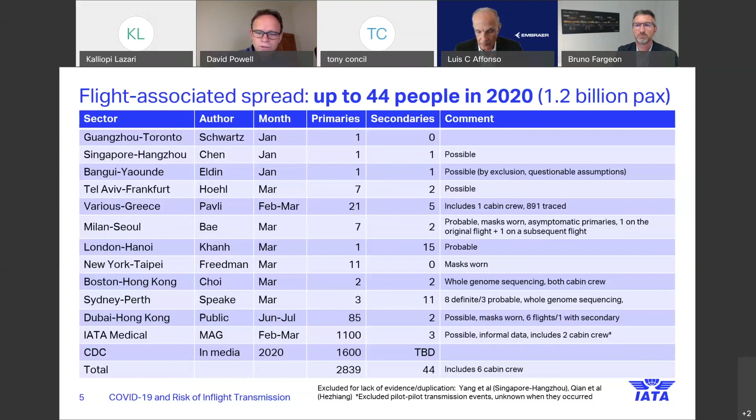So there we are, that's the summary. If we go to the next slide, totaling up those, it's around 44 - maybe a few more or less - but that's a tiny number, because even this year, at this point, 1.2 billion people have travelled.

So we're talking about one secondary case from the flight for 27 million travellers. Now, of course, this may be a gross underestimate of the actual number, but you can see that even if the real number is 10 times that, we're still talking about very, very low numbers.

One of the comms teams sent me figures from CDC for lightning strike. There are two different figures published in the US: 1 in 500,000 people per year, averaged over a number of years, and the other figure was 1 in 1.2 million people per year for lightning strikes. They're very different events, but it gives us an idea that this is an uncommon event.

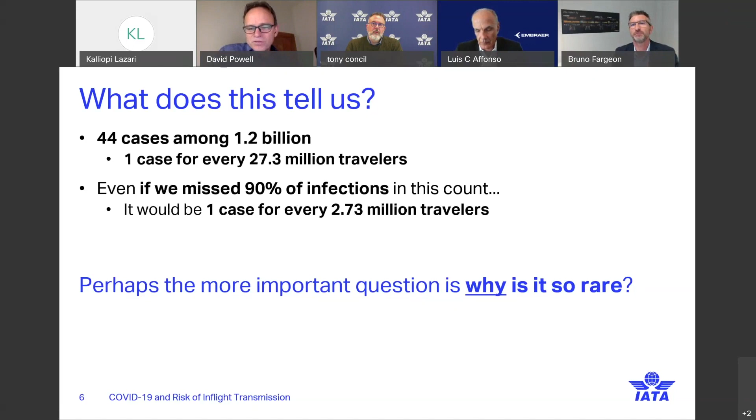So does that make sense for it to be so rare? Is that plausible, and why might it be so? Well, that's why we've brought the aircraft manufacturers to the table to discuss this, and just to give a prelude to some of what they'll discuss: we know that a number of features of the airline cabin have effectively designed in protections against transmission of airborne organisms, and here are a few of them.

Simply that people sit still, they face the same direction rather than face to face with each other. They don't tend to sing or speak loudly, and of course they don't tend to fly when unwell, so coughing and sneezing is not as common as in some other situations. The seat backs themselves act as a physical barrier.

And you're going to hear more about the airflow, but it is designed to minimize fore and aft flow of air, and the flow rates are high, and any recirculated air goes through high quality HEPA filters, and that's where the comparison often comes into hospital air supplies.

So I'm stealing the thunder of our esteemed guests from Airbus, Boeing, and Embraer, and we'll stop doing so and hand over to them. Thank you very much.

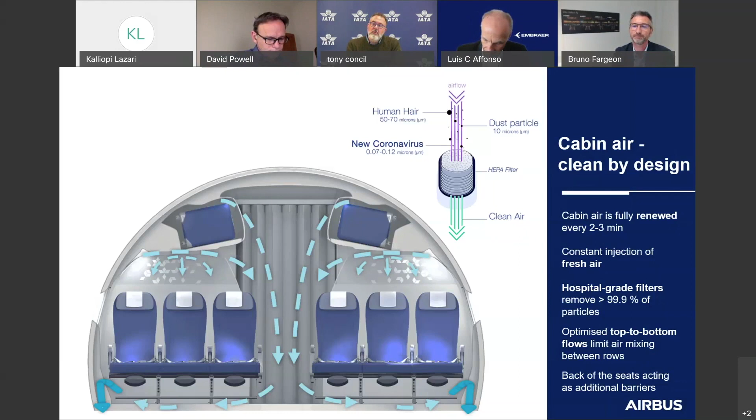However, we also recognize, in June I would say, that we're still seeing fears in some passengers, and we wanted to do some extra work and extra checks on how droplets, as emitted by a cougher or a talker in the aircraft, would circulate and therefore could potentially contaminate somebody by transporting the virus.

To do that study, we started by using our very detailed 3D computational fluid dynamic model that we have used to design the cabin flow for years. This very strong model has also been tested and validated against real data coming from flight tests or ground tests. So really, we know that the theory and mathematics behind the model truly match the reality on the ground and in flight.

We also asked medical specialists to tell us what they think is important whenever we want to inject a human event — once again, breathing, talking, coughing — into this model, and they were of great help for us to understand what we had to modelize. The model in fact meshes more than 50 million data points inside the cabin, and for each of these points we compute airspeed, direction, temperature, and the number of droplets passing by. We repeat this calculation up to 1,000 times to represent 1 second in real time.

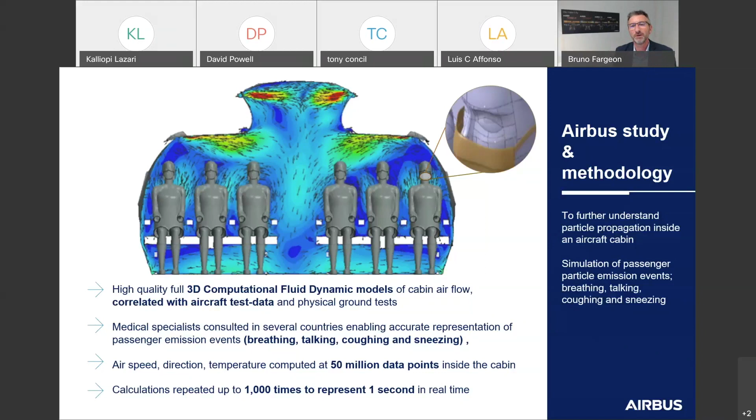And really wanted to explore all the space that can be explored with that kind of simulation. At the end of the day, that's what we found.

Keep in mind, one cougher, seen somewhere, is going to expel, in our model, 10,000 droplets from various sizes, a distribution of sizes from very small droplets, 1 micron, to large droplets, 750 microns. So the cougher is going to expel 10,000 droplets. He or she is wearing a mask.

The mask is going to stop some of the droplets, the biggest ones generally. Then gravity is also going to catch the remaining droplets which go through the mask, and they will fall on the ground in front of you. The smaller droplets will continue to float into the air, but the airflow of the aircraft, as I explained, is going to wash that very rapidly as well.

Some droplets will still go through, and they will be stopped by the mask of the person who is receiving, who is breathing. And then at the end, out of these 10,000 droplets, only 5 at maximum will reach and be inhaled by the person who is breathing. And this person can be seated next to the one who is coughing. As I remind everybody, we have fully loaded aircraft with all seats occupied by passengers.

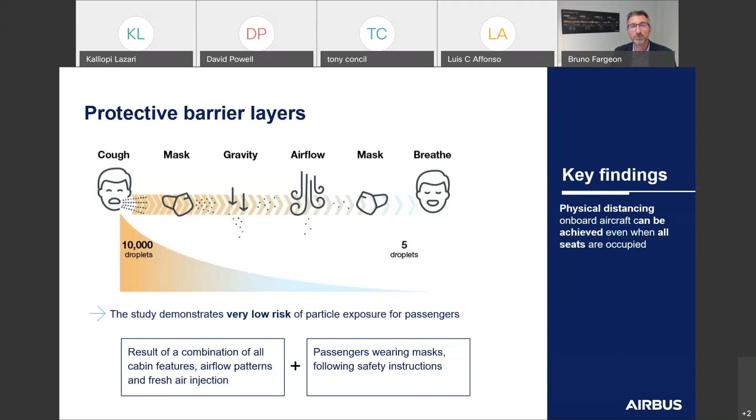And the medical yardstick that we use today is the social distance, the so-called physical distance, depending on the state. Some countries are speaking about 1 meter, others are talking about 1.5 meter. We took the most conservative one, which is 1.8 meter or 6 feet, coming from the US CDC.

And we did exactly the same thing as with the aircraft. We simulated with our model one person seated in an indoor environment, coughing, and we seated persons 6 feet apart from this coughing person. We also looked at the number of droplets that the others, being 6 feet apart, would inhale. And when we did that with the same model, what we found is that people could inhale 10 particulates, 10 droplets at maximum.

So think about it. When you're on the ground and standing 6 feet from each other, you could eventually inhale 10 droplets. When you are sitting in an aircraft next to each other, wearing masks, with the airflow washing constantly, at maximum you could inhale 5 droplets. So that means clearly that the aircraft is even safer than the recommendation that we have from authorities today to be standing or sitting 6 feet apart on the ground.

So as a conclusion, even with this medical yardstick, we really can say that the risk of being infected through the propagation of droplets in aircraft is very low.

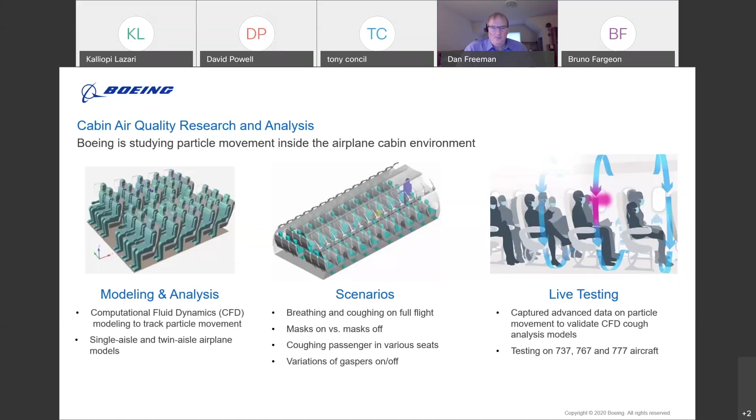So we're trying to relate the airplane risk of transmission compared to other common scenarios. And so we've picked two other scenarios to do the comparison.

The first one is what we consider the worst case for an aerosol transmission. It's where we have a cougher and a breather that are both in an indoor environment with stagnant air. There's no airflow, and that means there's no airflow to disperse the particles. The particles come from the cougher, who's pointed at the breather. They expand in a conical shape. And we measure the number of particles in the breathing area of the breathing person at different distances.

As Bruno mentioned, the heavier particles will drop out of the path because they're heavy and due to gravity. And the cough, because it's a conical dispersion, not all of the particles from the cougher will get to the breather. We've done simulations and understand how many particles will come into the breathing area.

The next scenario is a conference room where we'll have standard building airflow, air coming in and air exiting the building. We have a cougher in the room, maybe at different locations, and then we measure the particles in the breathing space of people at different distances away from where the original cougher was.

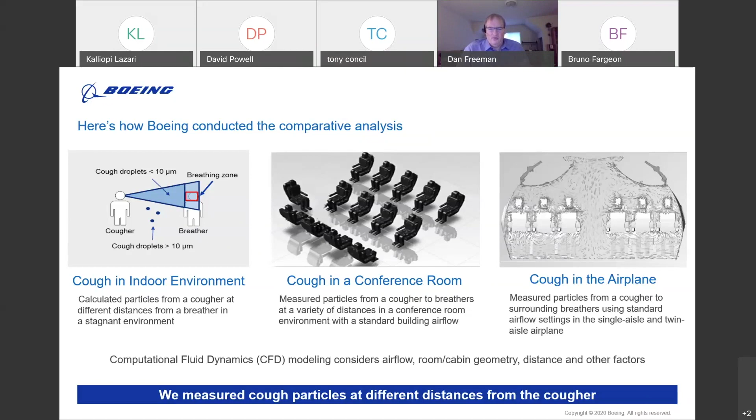As Bruno mentioned, medical doctors don't understand now how many particles it takes to become infected, and we're certainly not in a position to know that either. So rather than saying what the likelihood of infection is, we're using the number of particles in the breathing space as our method of comparison, which we think is a good, solid method of comparison.

So the results of our analysis show that if you look at the airplane, full flight, cougher sitting next to the breather, in the worst case with the worst airflow, what we found is that the number of particles in the breathing space compares to being greater than 7 feet away if a cougher is in an indoor environment with stagnant airspace, and also greater than 7 feet away in a building environment where there is some airflow.

We're using 'greater than' — we're not providing the exact number of feet at this point because we want to be conservative in our analysis. It's really important that we don't overstate that, but we are very confident that the number of particles in the breathing space in both of these scenarios is greater than 7 feet when compared to the passengers, coughers, and breathers on an airplane.

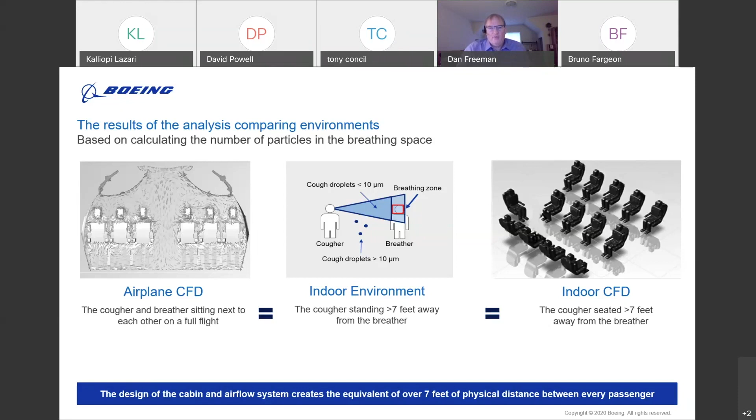And so that really is an independent way of reinforcing what Bruno mentioned with the Airbus analysis. Again, different tools, different assumptions, different airframe, different airflow, but very much the same conclusion, which has also been validated by our on-airplane testing. If you go to the last page, it's simply a summary that shows an airplane layout view with all the places on the airplane with an effective social distance between the cougher and the breather of 7 feet, based on particles in the breathing space. And with that, Tony, I'm going to go ahead and turn it back to you to continue the presentation.

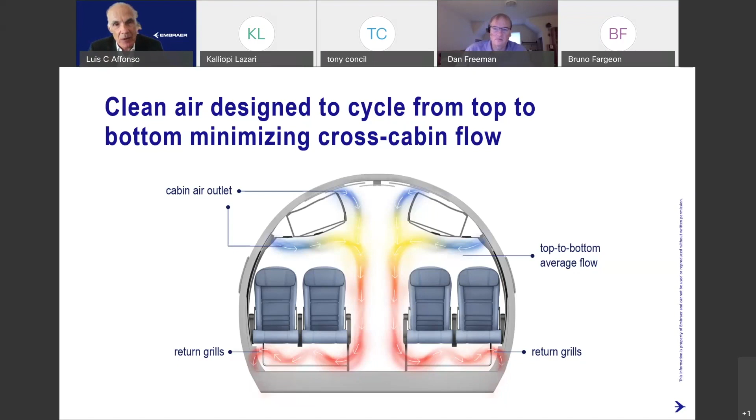As my colleagues have shown, this is a pretty standard architecture in an airplane. The air comes from top to bottom, washing all the particles away from the head of the passengers, helping gravity take all particles and viruses and what have you through the grills outside the airplane, as well as preventing a cross-cabin or cross-row mix of the air inside the airplane.

And the general public is always surprised by how efficient the HEPA filters are. But yes, they can filter with huge efficiency particles the size of the COVID virus, like 99.9+% of particles that size. All the airplanes in our production lines are equipped with HEPA filters.

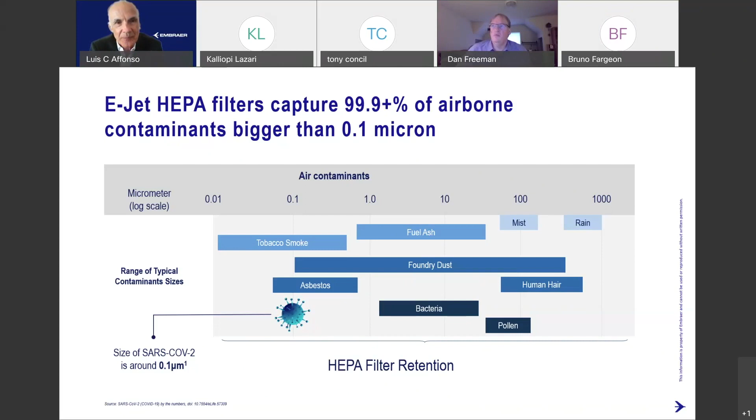And the HEPA filters are required to be maintained regularly. Our industry is a very regulated industry, so the HEPA filters are maintained. We did not have to change any maintenance interval after the pandemic, so whatever we were doing for years in terms of intervals is good enough to keep that efficiency level in filtration.

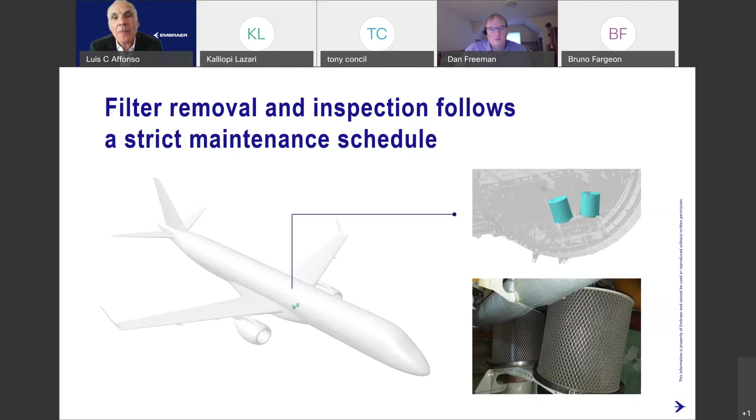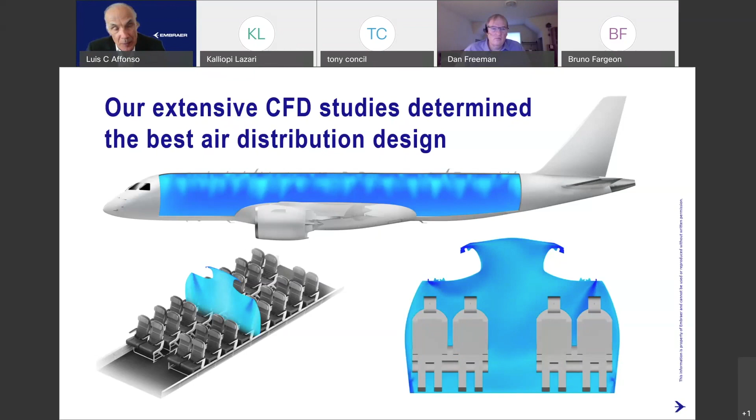And like our colleagues, slightly differently, we have for many years been using computational fluid dynamics studies to simulate the airflow inside the cabin for several reasons, including air quality, but also noise, comfort, and so forth. In our case we have a mesh of 60 million dots, and we use thousands of CPU cores to run it. So it's a very sophisticated model that we have for the entire cabin.

And we have validated and tuned these models in a full-scale mock-up, as you can see in this picture. So with that, we perfect the model to have a higher fidelity.

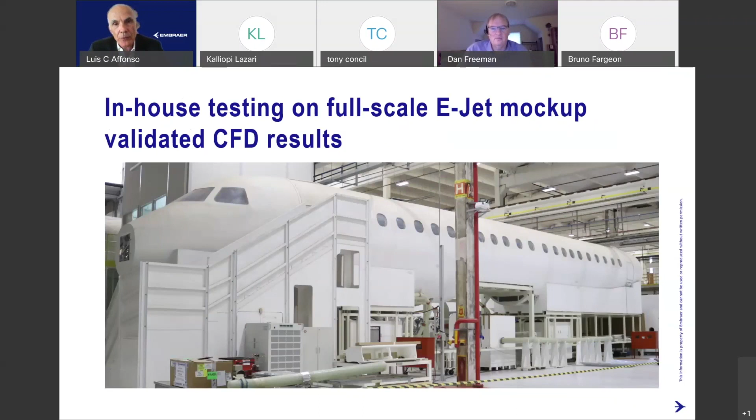And we complement that through lab tests we have been doing with several partners - academia, ICAO, NASA, SAE, Fraunhofer, IATA, and several other players in the industry. On the left, you can see particles being measured through laser. On the right, you see air quality tests with a mannequin, coughing, and air quality being measured in other locations. With that, we can say we have a very, very high fidelity model for air movements and particle movements inside our cabins. And this is what we have used to analyze the scenario under the COVID-19 scenario.

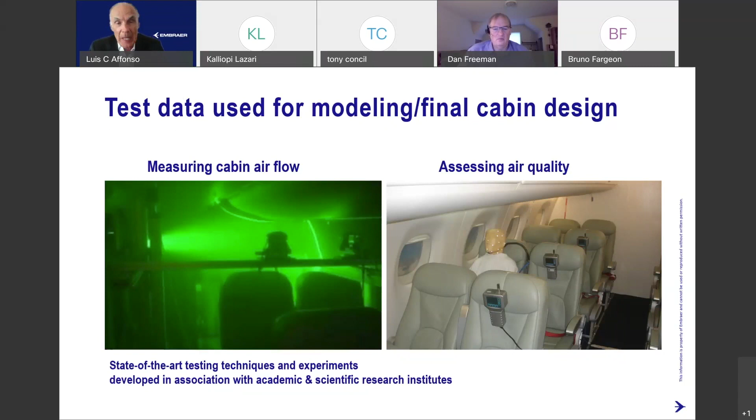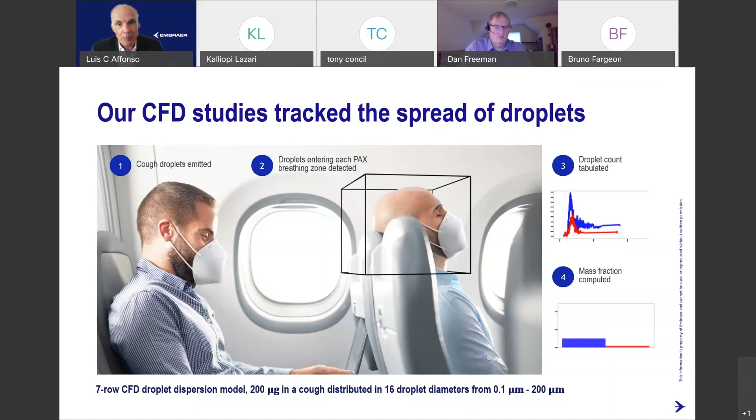And so this is what we did. We basically simulated a 7-row droplet dispersion. Our analysis is slightly different from that of Boeing and Airbus. We considered a certain mass, 200 micrograms in a cough, distributed in 16 droplet diameters. It was an aerosol analysis too, but more based on the mass inside a cough, with different sizes ranging from 0.1 micron to 200 microns. And in several scenarios - gaspers on, gaspers off, masks on, masks off, different positions inside the airplane - we computed all this. And in the next slide, we see the results.

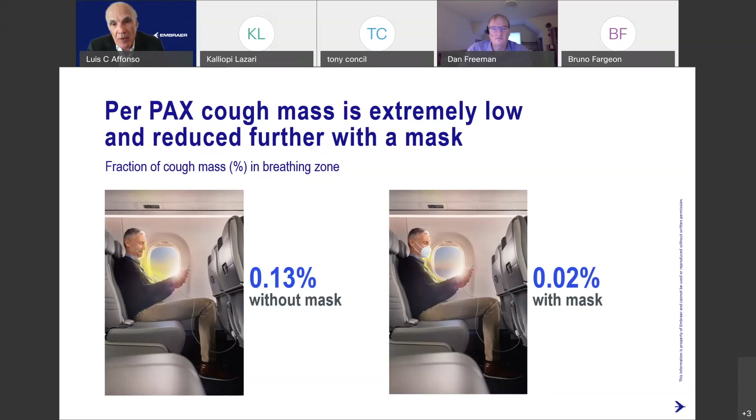After having seen the Boeing and Airbus presentations, it's really reassuring that we used similar but different assumptions, different methodologies, different cabin sizes and seat arrangements, and we've arrived at similar conclusions that the environment inside an airplane is very safe. This gives robustness to all our analysis and credibility to it.

So I dare to say, if you need to travel, if you want to travel and want to minimize the chances of being infected by COVID-19, put on a mask and get on an airplane. Thank you.

Great, thank you very much for that. I think we've lost David again, so I'll take you through a short transition period. If we can have the next slide. Oh, you're back, David. I am indeed. Sorry for that, but like magic.

There's little to say here except to echo what's been said, and that the risk of onboard transmission appears to be low, and to some extent this represents the features of the aircraft that were designed in. And certainly it's enhanced by mask wearing.

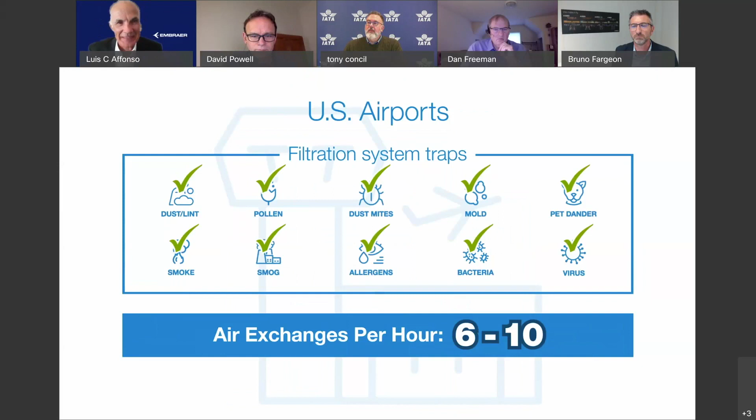Great, so we'll now start into the questions. We have a first question asking the manufacturers: as a result of this study, have you changed any of your recommendations to airlines, or your approach to aspects such as filtration and design? It's open to Boeing, Airbus, or Embraer.